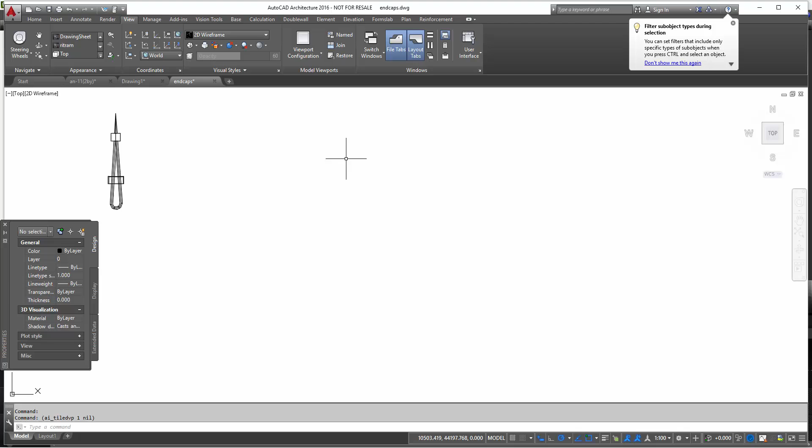Before you start drawing a wire loop, you have to go to your supplier company and check all specifications with the right measurements, and then take a polyline and start drawing a 2D model, right sizes like a plate, and then we will be making with the solid functions in AutoCAD a 3D model, and out of the 3D model we will make a casting material in our database.

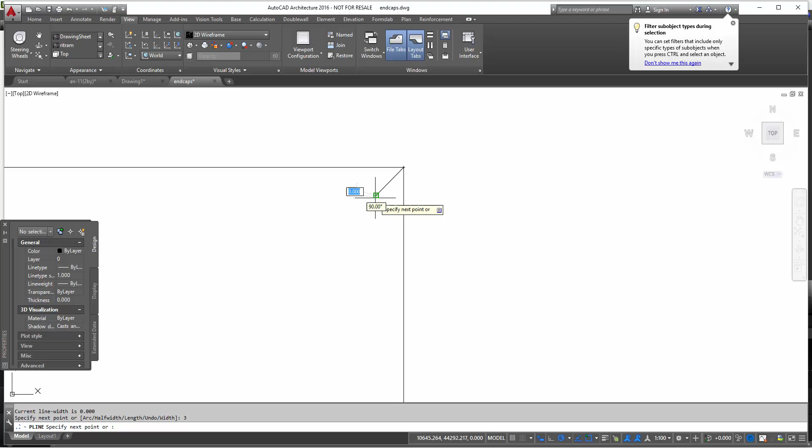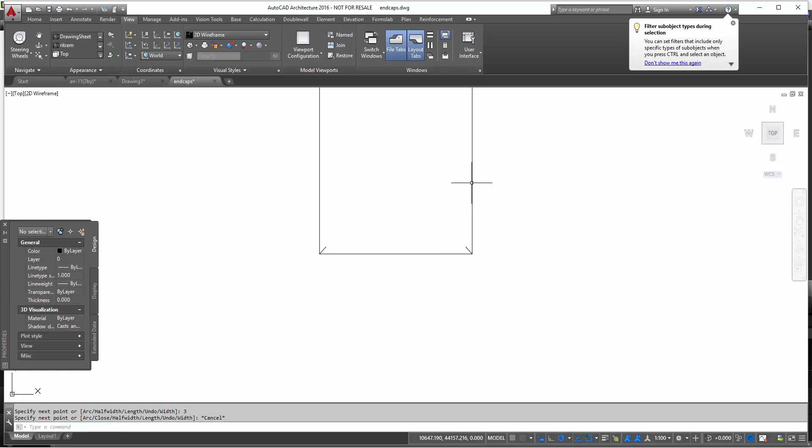So I take my measurements, I draw some additional lines to indicate the thickness, the right thickness of the plate. In this case I will make it 3 millimeters thick. Now we draw the inner shape. And don't forget to close the polyline.

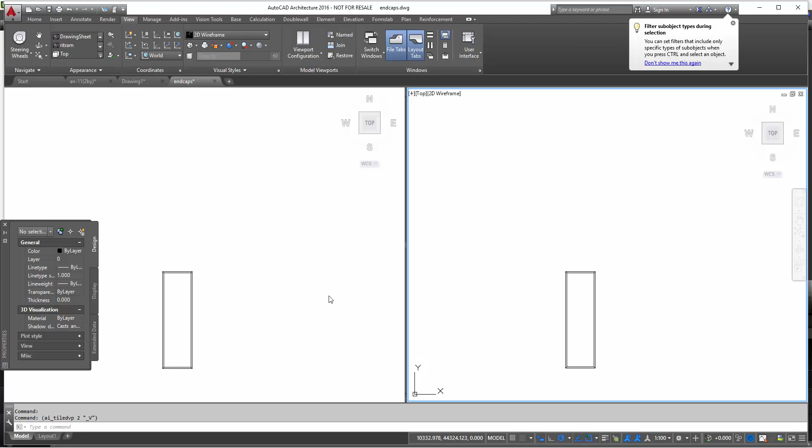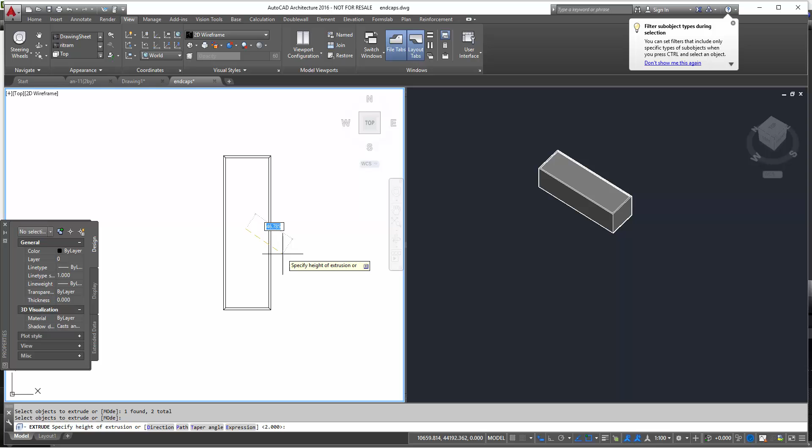Now to make it easier, we make two viewport configurations, so we can see a 3D model and 2D. And now we will take the option extrude and we bring it up 20 millimeters, according again to our specifications from the supplier. I want to subtract the inside shape, so I just delete it with a subtract.

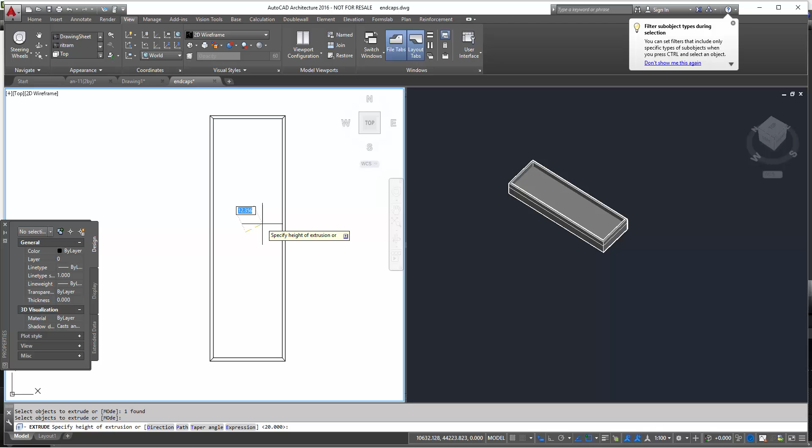And I will draw a base for the plate. Again, close the polyline and extrude several millimeters up. In this case, I make it 2 millimeters because our supplier has a specification of 22 millimeters for the wire loop plate. So that's how our wire loop plate base looks.

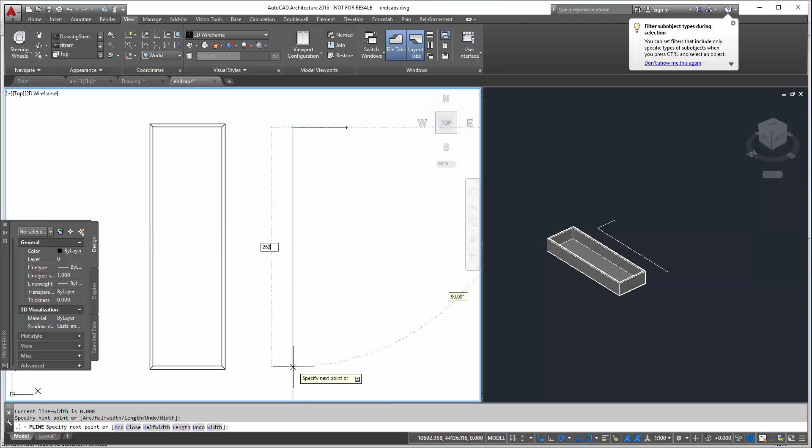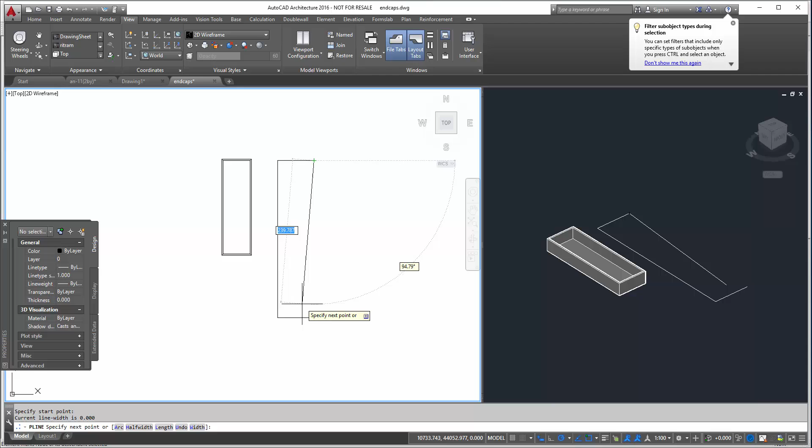Now we will try to draw a wire. So basically I want to indicate the right height of my wire as a reference line. And then again with polylines I draw the shape I want to have. You can use some additional commands like copy or mirror or rotate and have the same shape or line. Now I just move it.

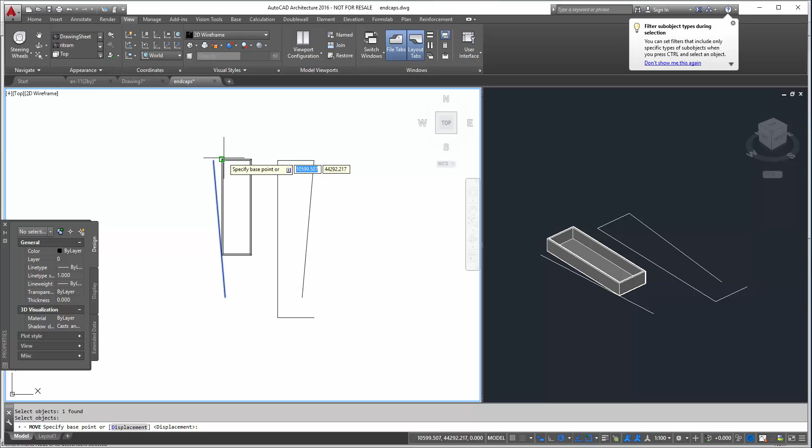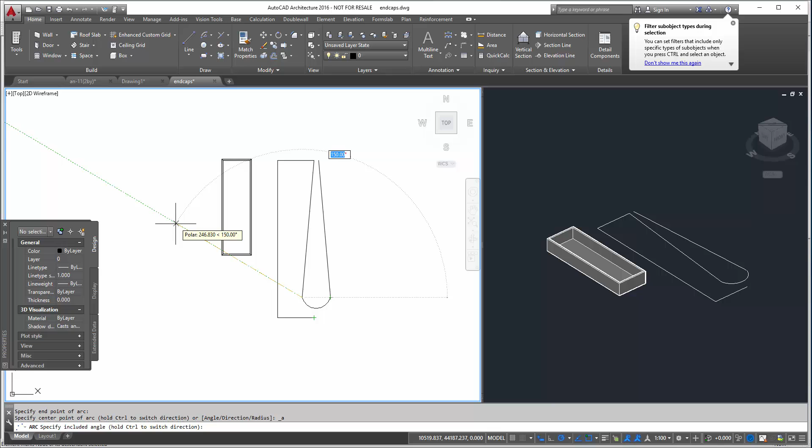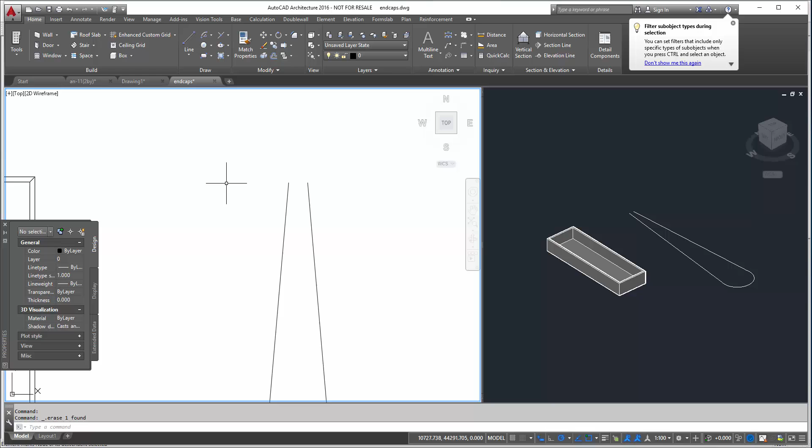I take a circular line and draw the ending of the wire. And now it's done. I join them together with the command join. And I can see that I have just one piece of polyline. Now basically I have to draw the shape for my wire with the right thicknesses. So my thickness will be 4 and later on 8 millimeters.

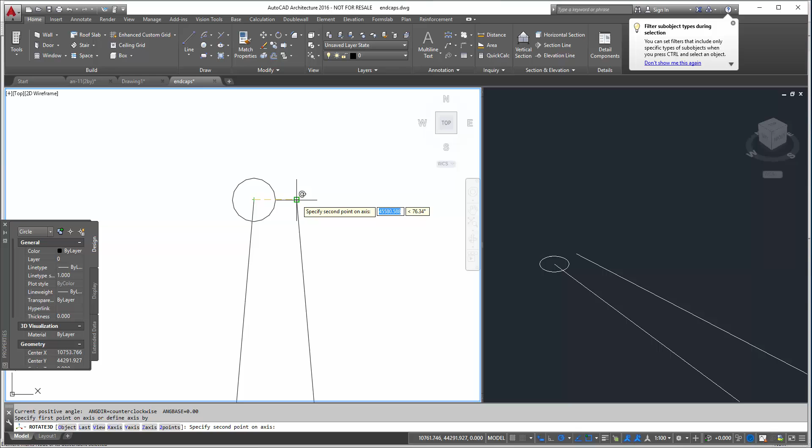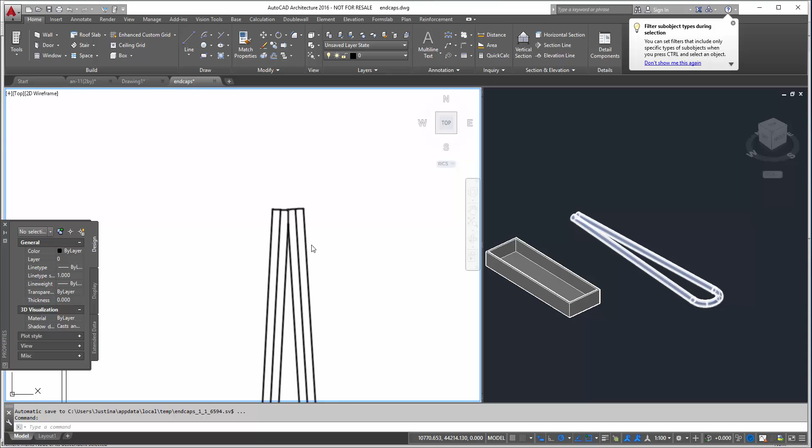Now I have to rotate it because it has to be 90 degrees with the wire shape. I have it done with the rotate. And now we will sweep according to the path we have just made. I take the shape I want to sweep and the path. Confirm. And we can see that we have our 3D wire loop done. Now we just basically have to join two shapes together.

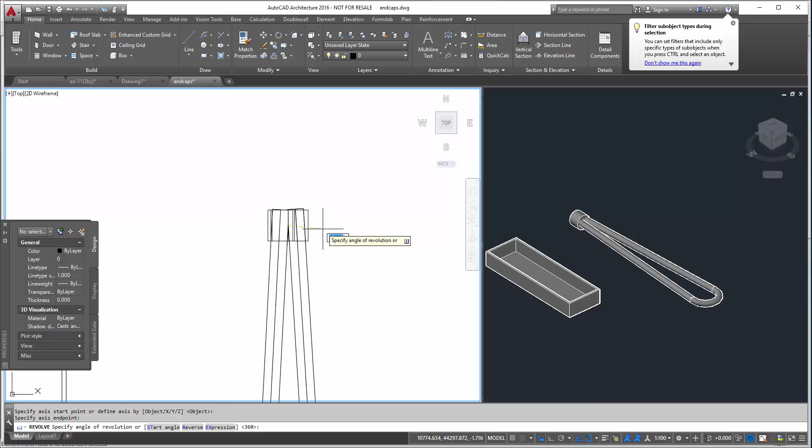But before that, I will draw the locker for the wire loop. Basically, just draw one half of the element you're making right now, and later on we can just revolve it with the revolve command in AutoCAD. So we take it, then we mark a polyline and specify the axis and how much you want to have your element revolved.

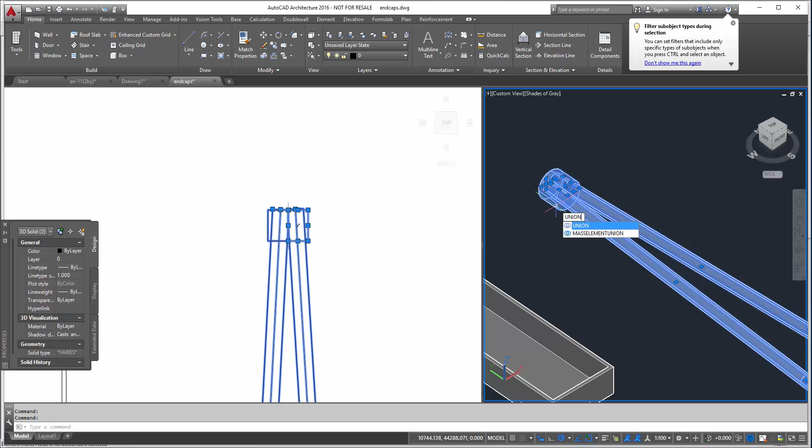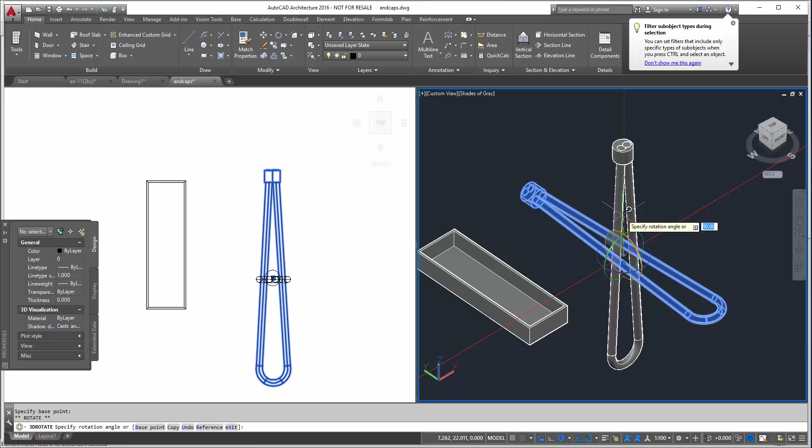Now what is left is that we have to join those two details together, also with the right measurements from the specification company. So before we do that, we make a union with the locker and the wire loop. And then 3D rotate, I select the element and I choose the axis I want to rotate according to. Once it's done, I have to move it to the right position.

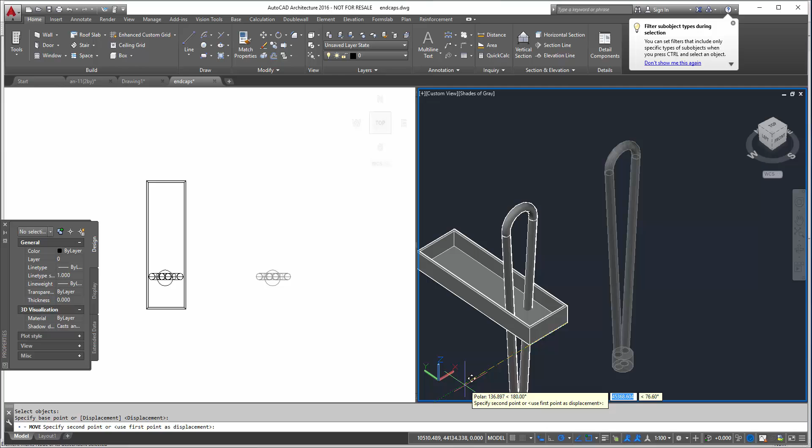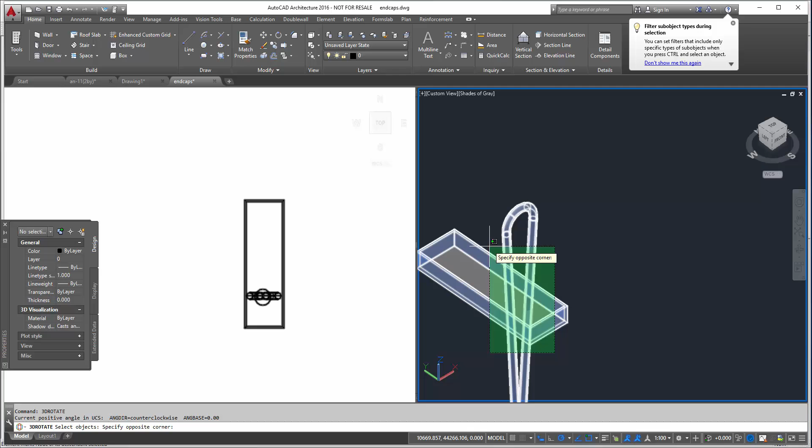On the left side, you can see the 2D view. So basically, you can modify your move command to have it in the center. Because sometimes it's very hard to see everything in 3D and it's not the right view to be sure that your element is fine. Now I'm trying to rotate the wall element. Delete some reference lines you have made before.

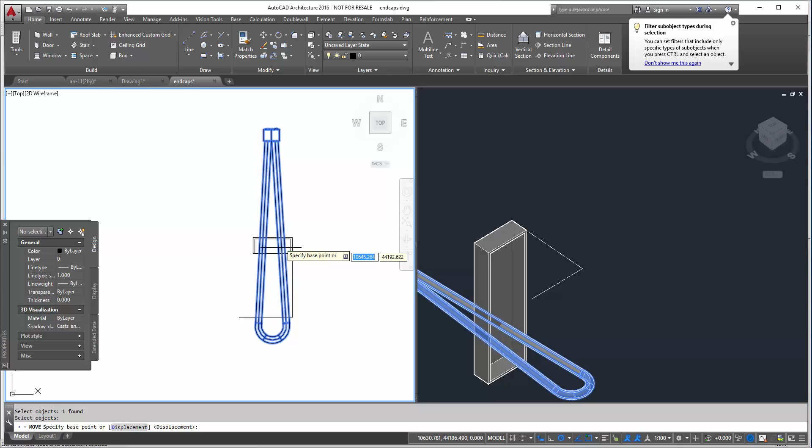And I will draw a polyline to see how my wire loop should actually be standing, because my supplier gives the exact dimensions and measurements for the wire loop, so I have to follow them, and that's why I draw a polyline as a reference line. Now when it's done, I can join the elements together and I make a union.

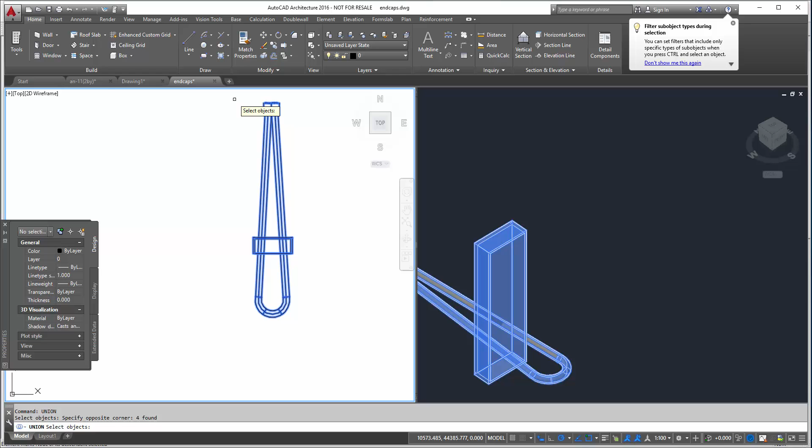And our 3D model is done. It wasn't so hard, you just have to make it in the right measurements and use the right tools in AutoCAD. Now try to center your insert in the origin line, so you can mark the origin line before you make it.

Now we will make a new casting material. I give it a name and try to describe it. In this case, it's wire loop 80 PVL. Now select 3D in the symbols and select the wall element. After that, specify the insertion point, and AutoCAD will ask if you want to make other views out of that view. You agree, and now you have all your side, front, and top views in your database.

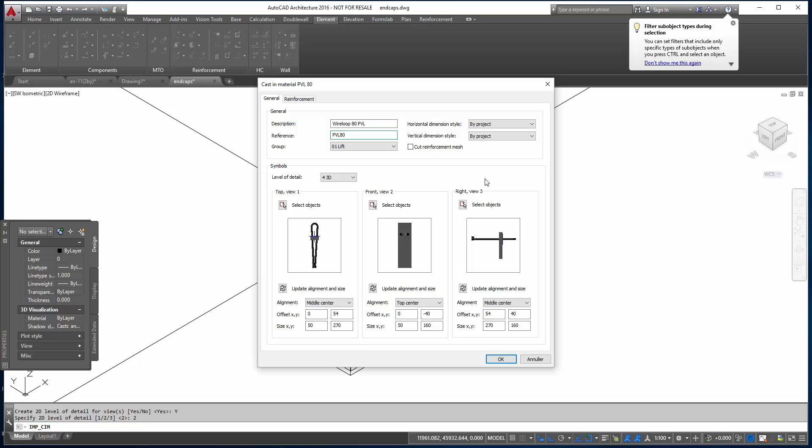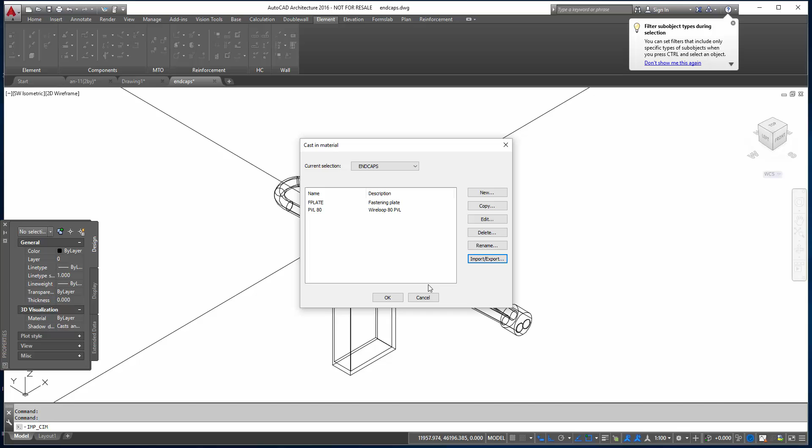Check everything is right, give a reference again which will be shown on the shop drawing, and save it. Once we have done that, you can go check it, and we will import our project because I have done it in another project. So I exported it to Sports Hall, and I go back to my project. I can see it.

Once I have the casting material ready, I can make a template. So I go to templates and make a new template for this wire loop casting material. I name it PVL80 and describe it a bit.

Now I will place what kind of casting material I have. First I choose the end cap I'm going to use it for - it's the straight end cap. Then I place a casting material and what side I want to have, and it will be placed on side B in a wall. I see that I have to rotate it 90 degrees and place it in the right position so it fits in my end cap.

Then you can describe a bit of the treatment - in this case, it has to be covered. And then placing in top, bottom, left, and right. In setup 1, I don't have any end caps in the top and bottom, so I just place zeros.

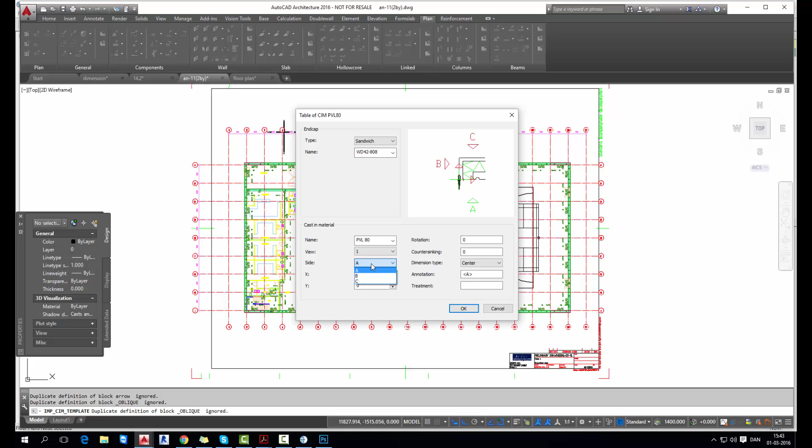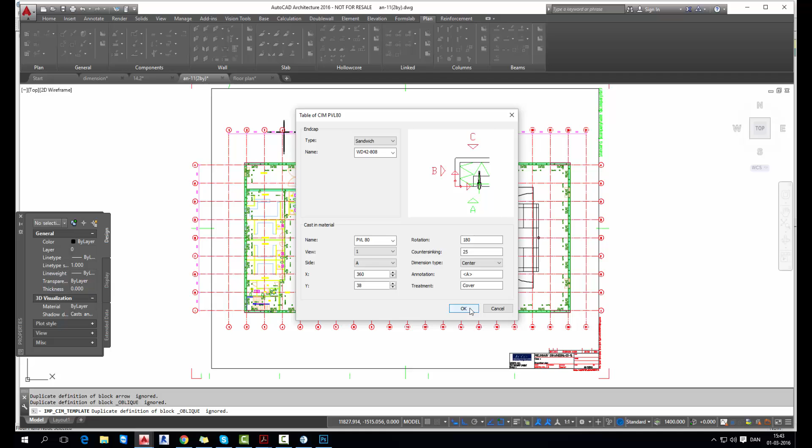I choose the same casting material, rotate it, and indicate that I will use it for side A, and place it according to the coordinating system. You can also describe a treatment. I just double check the positions - yes, and the positions are right, so I confirm with OK.

And now I will apply the template, so I can basically select all the walls at the same time, and select the template you want to use. It will take some time.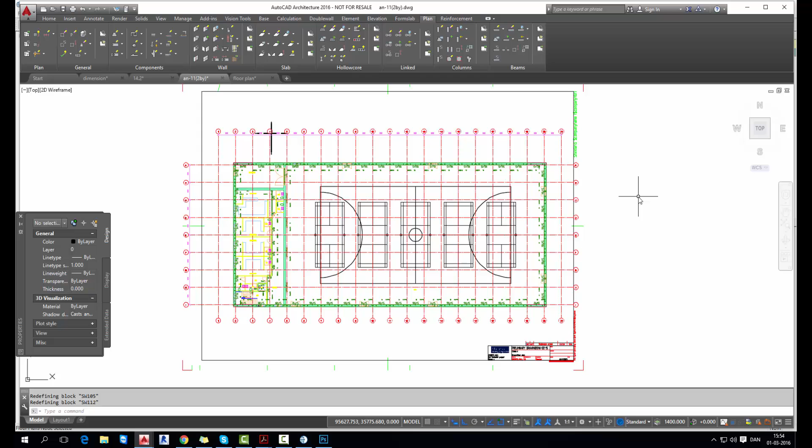And then we say with the same element mark, we can go to the 3D view. Of course, it takes some time to place all the cast-in materials - we have 6 cast-in materials for each wall. And now open 3D view, and you can see that in the corner for this end cap we have 3 cast-in materials, 3 wire loops, and the same with the straight connection.

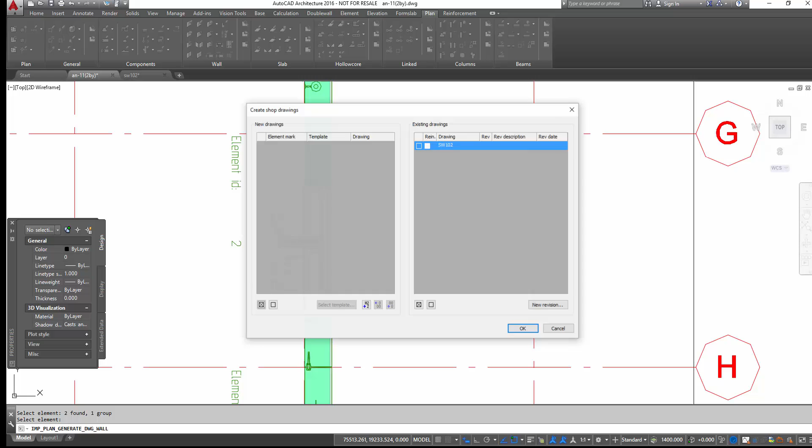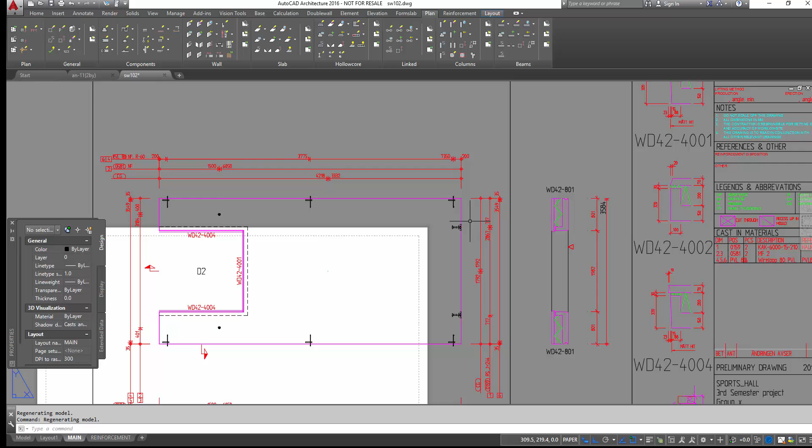And now it's done, we can basically create a new shop drawing. So create new, generate, and click on open shop drawing. Now you can see in the shop drawing that we have on the left side 3 wire loops and 3 wire loops on the right side with the right measurements that we have stated in our AutoCAD command apply templates.

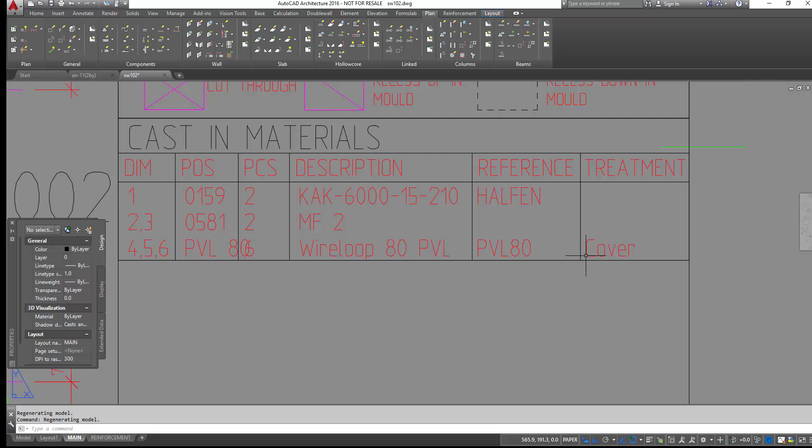And also you can see all the end caps we have in our shop drawing that we have created before and applied for our element. And also in the cast-in materials, we can see that we have our created PVL wire loop of 80 millimeters and the treatment we have stated.